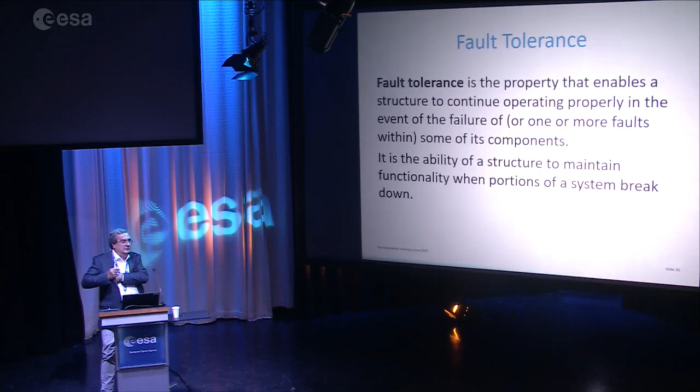Okay, can we continue?

Just to remind you, one fault tolerant is the ideal situation for everything. So everybody would like to have two reflectors, two electronic boxes, not only in the structural domain, but in any domain. But it's impractical, and of course it is not possible in most cases. But still, sometimes it is the only solution.

Okay, about the standard on fatigue and fracture control, just to mention that fracture control and fatigue is extremely important for the safety, the reliability, for manned and unmanned applications. This is what we call the structural integrity, is guaranteed with that.

Now let me tell you the difference between fatigue and fracture. If I do a test where I subject a structure to a cycling set of stresses, I can have the structure, for example, lasting a few million cycles, 2 million, 3 million cycles. This is what we call the fatigue limit. Of course, if I increase the stress, the number of cycles will decrease.

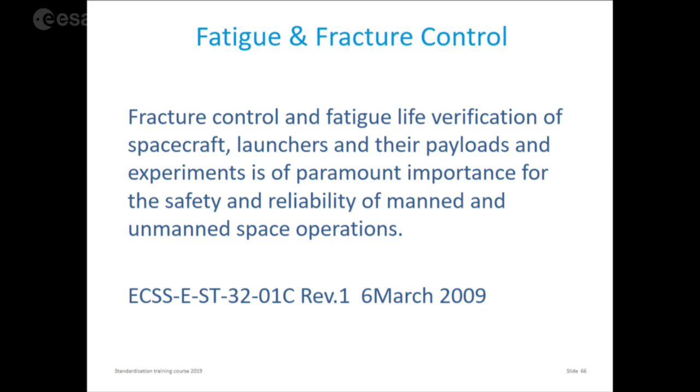the loading of a structure is not like that of an aircraft, where you have many lift-offs and landings, and a lot of loading applied during many cycles. In a spacecraft, the loading has fewer cycles.

I don't think that, depending on the frequency of a particular element, you can talk about more than 50 to 100,000 cycles with significance for this breakage.

Of course, you also have the thermoelastic effect during the whole life of the spacecraft, but this is normally not imposing a huge stress level. It's more related, as I mentioned before, to alignment capabilities, etc.

So why do we do that then? Because if you have a problem with an aircraft, for example, or with a car, you can solve the problem on ground. When we launch our spacecraft, unless it is a manned space flight, and also costs a lot of money, for an unmanned spacecraft you cannot repair anything. That's why for critical elements we apply this damage tolerance approach.

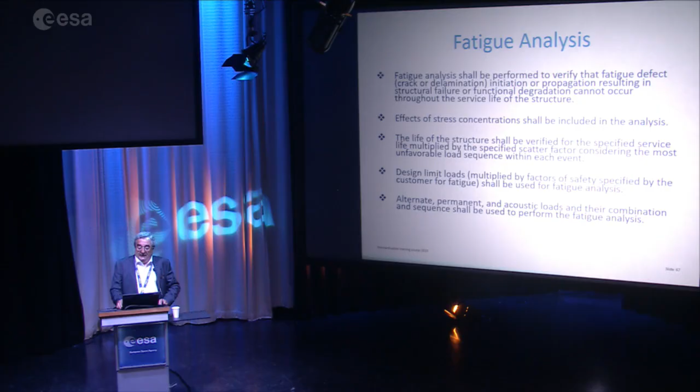This chart talks about how it is implemented, the fatigue analysis as part of the fracture control.

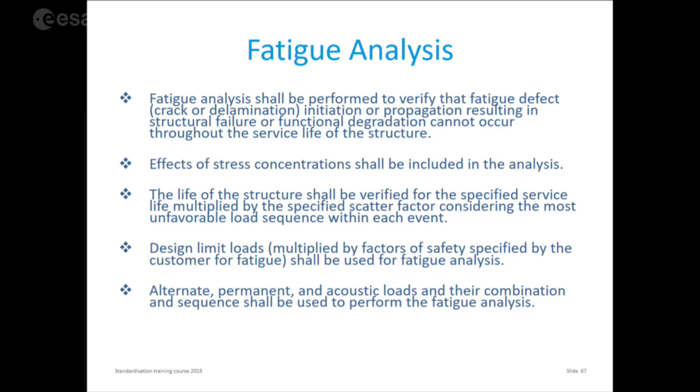And I say sometimes we do fatigue analysis, sometimes we do crack growth analysis, depending on the criticality of the element.

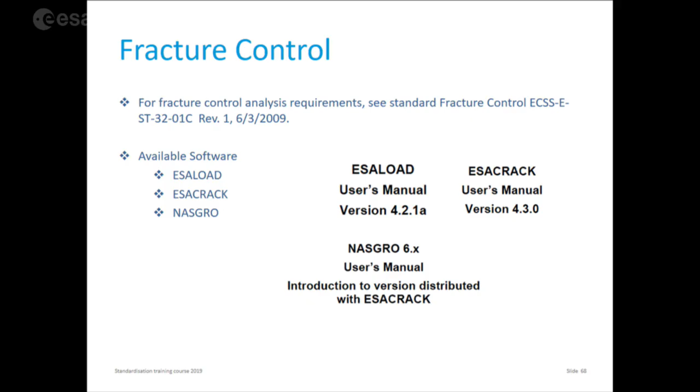And this is the software that is available. It's a software provided by ESA to all companies working in space. The ESA Load and the NASGRO are two modules: ESA Load implements the load, calculating the load spectrum depending on the number of load events and the frequency of the payload. NASGRO is a module developed by NASA, calculating the increase of the crack up to critical location, and all this is implemented in ESA Crack. Okay, just for you to know this is available, and the industry also has access to this, only for space applications.

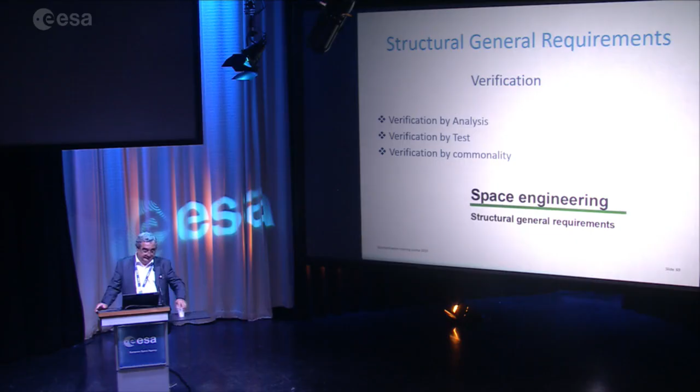Let's go now to the big part of the development of the spacecraft called verification. We have three types of verifications: by analysis, by test, and by commonality.

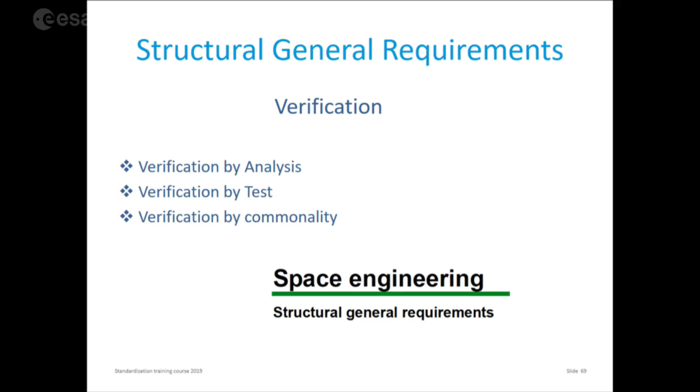The first thing we have to distinguish is the model philosophy that I mentioned before. We have a prototype approach where I have a qualification model which is tested at higher levels than the flight levels, and then the flight model is tested to the acceptance levels, which are the flight levels.

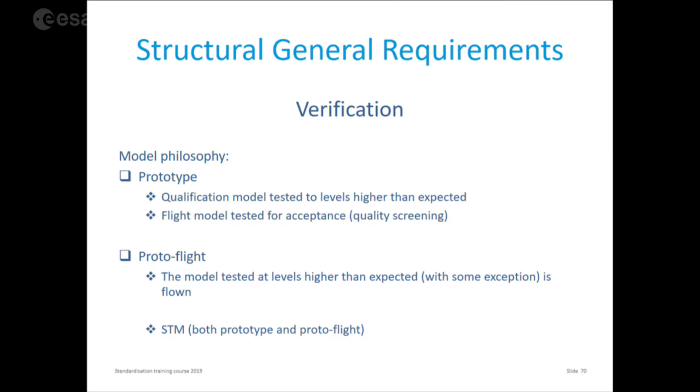I have the proto-flight approach where my model is tested to the high levels, with some exceptions, and two durations which are acceptance. But the proto-flight levels are the same as the qualification levels.

And then I have something called STM, Structure Thermal Model, which is applicable to both prototype and proto-flight. I'm telling you that when I started to work in this agency, the prototype approach was the typical one, including an STM. So we have STM, qual model, flight model.

With the passing of years, we had only the proto-flight, in most cases, with an STM. Today we have proto-flight without STM because of cost reductions, and because there is also a lot of experience, I have to say, which is logical. Sometimes when there is a new development, I think we should never renounce having an STM. This is my personal opinion, at least for the structural aspects. But I have to tell you that today there are developments where we have only proto-flight, we don't even have STM.

Another important point to prepare the verification is to have verifiable low-level requirements which are flowed down from high-level requirements. So one of the most important tasks in spacecraft development is, as I mentioned, the verification. The verification is done, as I showed you in this chart with the V, at different levels. If the requirements are verified at all levels, it's because they have been properly flowed down by the prime. So the job of a prime, which is very important, is twofold: to identify all the system level requirements, and also to be able to flow down those system level requirements into proper requirements of subsystem and unit.

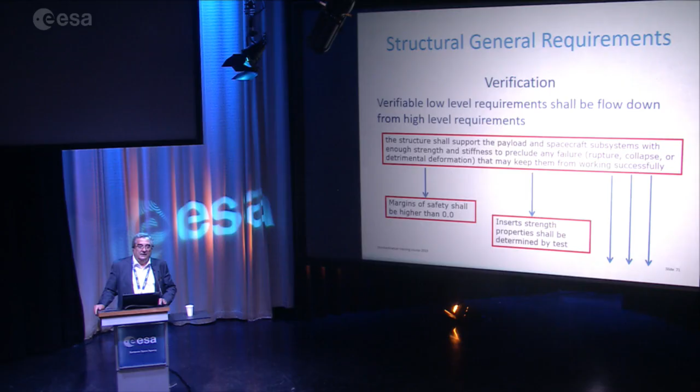Let's go to the one on the right. Today it's very common to have carbon fiber aluminum sandwiches, carbon fiber facings, aluminum honeycomb sandwiches, with a lot of inserts which are potted. Maybe you can have hundreds of those inserts. The requirement calls for the verification of the strength of all those flight inserts. I'm talking about flight hardware, 100%.

This is something that is not done in all developments. Sometimes 100% is verified, sometimes because there is a lot of experience, a lot of values of strength of the insert vis-a-vis the manufacturing process, which is very well known, there are only a few of them which are tested. So this is a typical example. The cost of the structure will be different if I have to proof test 100 inserts than if I have to proof test 500 or 50. So this is a good example of how important it is to flow down the requirements properly, because this affects the whole development and the verification.

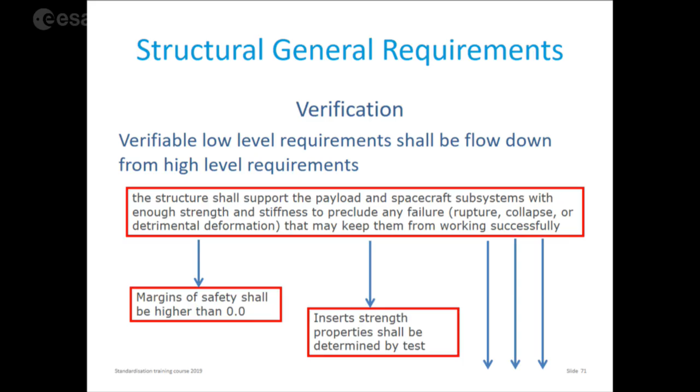It's not the same spacecraft that goes like Rosetta, very far away from the sun, as another one like Solar Orbiter that is very close to the sun. You have different configurations. You need a thermal shield for the second one, you need big solar panels for Rosetta, etc. There are differences.

And in this configuration, you have to consider, as I was saying, these functional requirements for all the subsystems. Then you have a preliminary spacecraft design, and for this you use the launch loads from the user manual of the launcher, and of course you implement your natural frequency constraints. You do a structural analysis developing a finite element model, which consists of a dynamic analysis, a stress analysis, and you also do a thermoelastic analysis, for which you have to do a thermal analysis first.

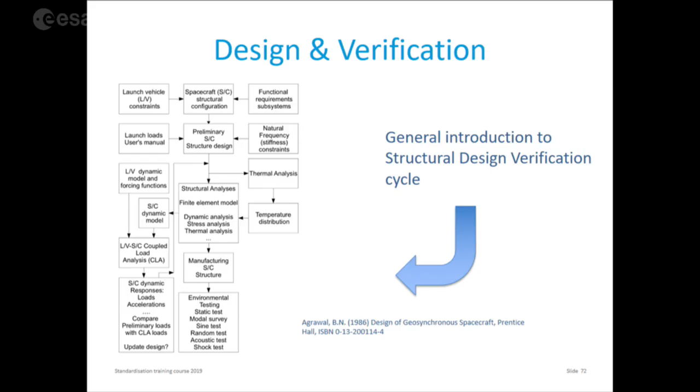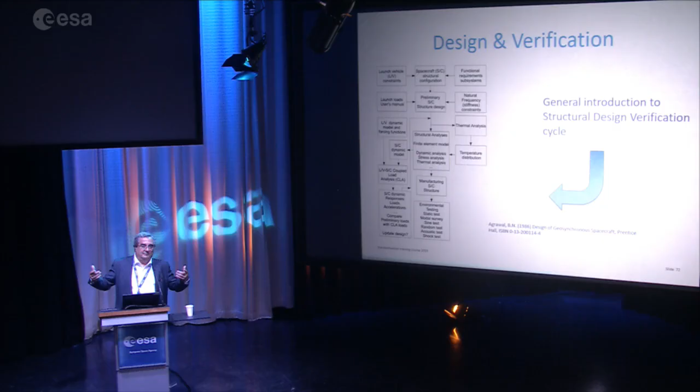So we have an idea of whether the acoustic pressure will be okay for all the elements which are critical to acoustic pressure, and we also have an idea of what the random levels will be in the different small units that we have in our spacecraft. And this is later confirmed by the final acoustic test.

So the design and verification process is more and more these days supported by more sophisticated analytical means, which are not eliminating testing at all, because I don't think that will happen, but will help in having a much easier and smoother verification. Together with the fact that for the sine test, I also believe that in the next years we will have verification done with direct transients at the interface of the spacecraft, rather than by the sine sweep, which is quite conservative. But this is still to come, both things.

This is an example of mechanical testing on ground. This is the static test to check the structure of the Sentinel-3. What you have on the left is the primary structure, and this was tested with the device you have on the right, including test jigs and actuators.

This was just to prove that we could test that the structure had the capability to withstand all the loads, and this is done at the early stage, as soon as we have an STM of the spacecraft. Of course, when I don't have an STM, I cannot do the test, obviously, and I take more risk.

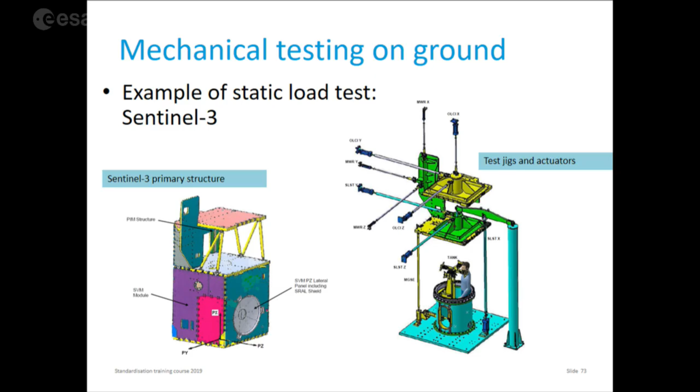I can also take my structure and put it in a shaker, and instead of sweeping from 5 to 120 Hertz, I can take it at 10 Hertz and do a test at a fixed frequency. Of course, I ramp up first, then stay a number of cycles at 5Gs, for example, then go down. This is a way to implement 5Gs in a quasi-static way in my structure. I do not like this test because it's quite damaging. I think static testing is better, and this is not done very often.

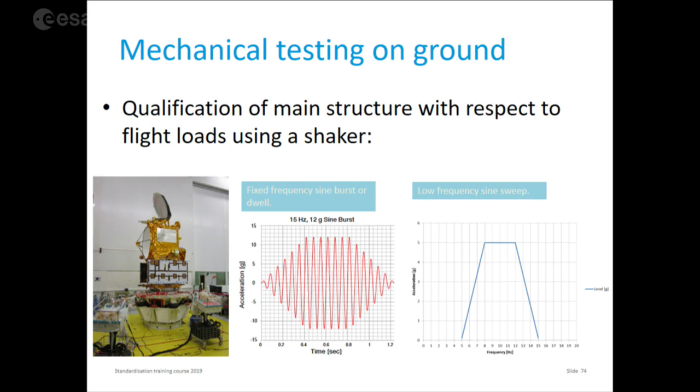A similar version of this setup, where we don't have to change anything, is a typical sine sweep from 5 to 100, 120 Hertz. This test, which is the sine burst or sine dwell I mentioned at a given frequency - in this case 15 Hertz - was done to qualify the structure, also with the STM.

Another test that is part of the verification is the acoustic noise test. This is the Rosetta spacecraft in the large acoustic facility of ESTEC.

Here, what is important is that I have a sound field that is uniform, implemented similar to the spectra coming from the launcher. The chamber has to be large enough because we have a volume effect. I cannot put in an acoustic chamber a spacecraft that is taking 90% of the volume, because then I would not be able to control the sound input.

The walls are very thick, but they also have to be smooth to allow high reverberation, which is the effect that will allow me to have specific sound pressure levels with a given spectrum, so many decibels. Typical decibels are 130, 140 for a qualification test - more than that at mid-frequencies, in the order of 300 until 2000 Hertz or even less, and then going down afterwards.

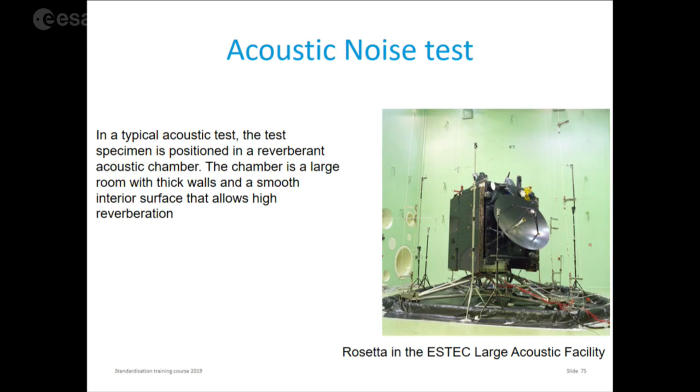It's also important to see that when I have a spacecraft in the acoustic chamber, I should try to have it not parallel to the walls, because of this effect - you see that Rosetta is a bit rotated.

In the last years, there is another acoustic test method being developed that is called the direct field acoustic noise test. This is basically to surround my spacecraft by a number of loudspeakers and a control system. I need a controller. At this moment, there are a number of spacecraft which are verified with this method.

For example, some of Galileo's spacecraft were verified by this method. There are a lot of American spacecraft which are verified with this method. Now we are working at ESA setting up guidelines to compare this with the other method, to make sure we can use both methods at the choice of the prime, and that both are going in the same direction to qualify your structure acoustically.

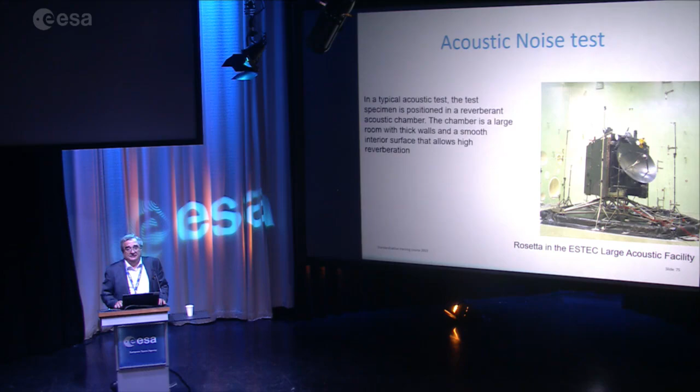With this one, you have a dedicated facility where you put your spacecraft. Due to the shape and volume of the facility, the different holes you can see there, and the smoothness and thickness of the walls, you are able to provide a reverberant noise field. This gives you control, so you have the given energy at each frequency.

In this other one, you can be anywhere - you can be in the living room of your house. Of course, I don't recommend your house. You surround the spacecraft with a number of loudspeakers, and then you need a controller.

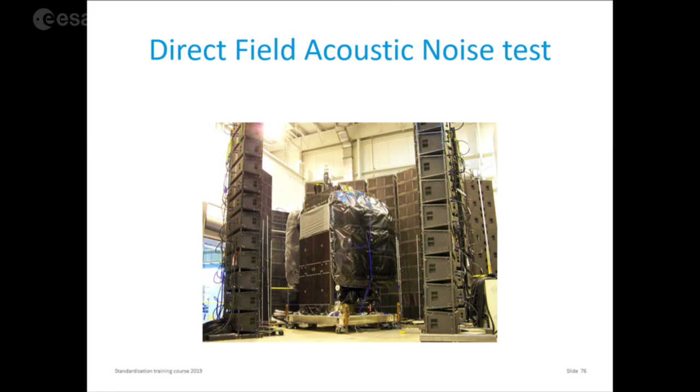There are companies developing controllers which control the energy in each loudspeaker, and in the end it is a sound level that is called direct field acoustic testing, but it should be providing the same - and this is the difficult thing we are evaluating - the same energy at each frequency band.

The advantage of the second one, it depends - the bottle is always half empty, half full. With this method, you can put your loudspeakers in a truck and go test anywhere. With the other one, you need to have the facility. Yes, but once you have the facility, well, you don't need this other thing. So it depends whether the facility goes to where the spacecraft is, in which case I do direct field acoustic, or the spacecraft goes to the facility, and I do a typical reverberant acoustic test. The important thing is that both are possible, and both achieve the final goal, which is to qualify.

One thing I have not mentioned - sorry if I forgot - is that the most important objective of a test is to provide the correct input. So if I do a sine test and have to test my spacecraft to 1G up to 40 Hertz, and then go to 5Gs later on, I should be able to control the shaker to provide this input. If I provide more, I can break it. If I provide less, I will underqualify my spacecraft. In acoustic testing, it's the same thing.

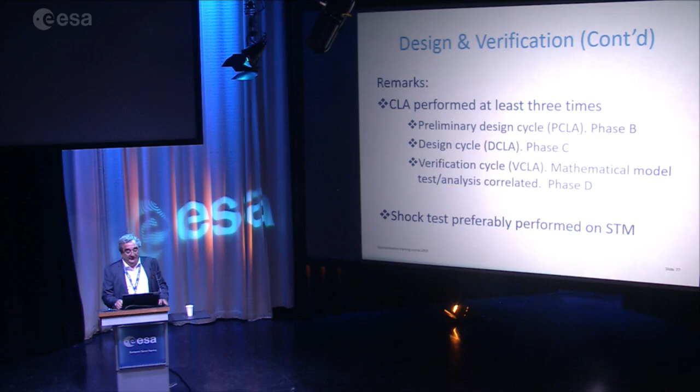Then I think I already mentioned these two things. We should do the CLAs at least 3 times, hopefully in the future even more. And the shock test should only be performed on the STM to identify this - this is also part of the verification, of course, on the STM to verify the transfer functions and to do as few shock tests as possible on the flight units.

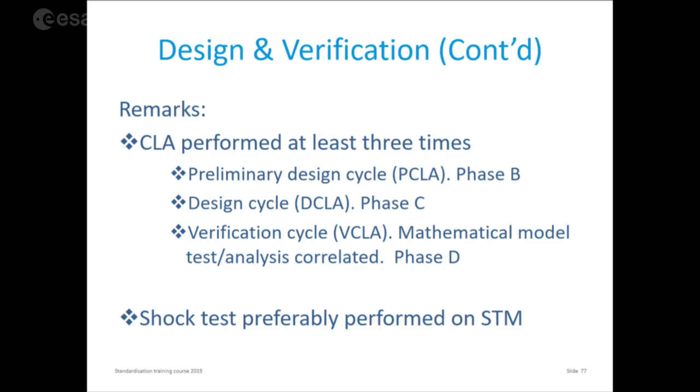Okay, what is the final verification? The final verification - everybody knows what a VCD is, no? A verification control document is when you are already in full compliance with all the requirements. If I have requirements, I verify by analysis, I have the stress report, the analysis report. If I have requirements verified by test, I have the test report, and everything is okay.

Also, before that, normally there is something called the VCD - that's the final one - but you also have the verification control procedure, where you check what you have to do. You check whether the verification of your requirements is appropriate. So sometimes you do a verification by analysis that is not enough, and this you have to know beforehand.

For example, I have thrusters in my spacecraft. I may have thrusters for attitude and orbit control. I want to have these thrusters tested at unit level. Some companies say, no, I have a model of my thruster, I don't do any test, I do just an analysis. This is a typical discussion example. Then, before I enter into the full verification, I need to have this clarified. Because if I go to my verification, I request a test on the thrusters at thruster level, and they have not performed it, then we have a hole and a big issue.

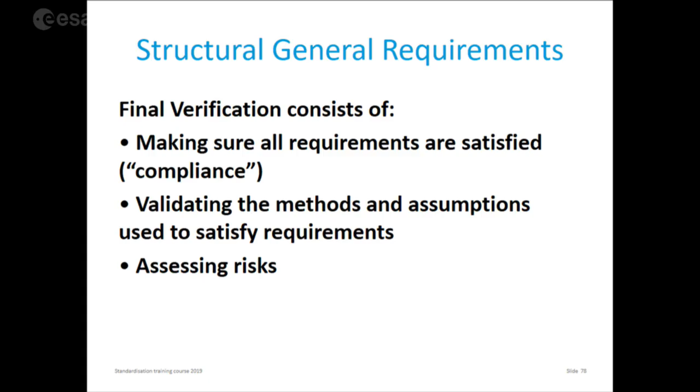The typical criteria for assessing the verification of loads is that the margin of safety must be greater than or equal to 0. All the structures must be qualified by static or sinusoidal testing, and also by acoustic or random testing.

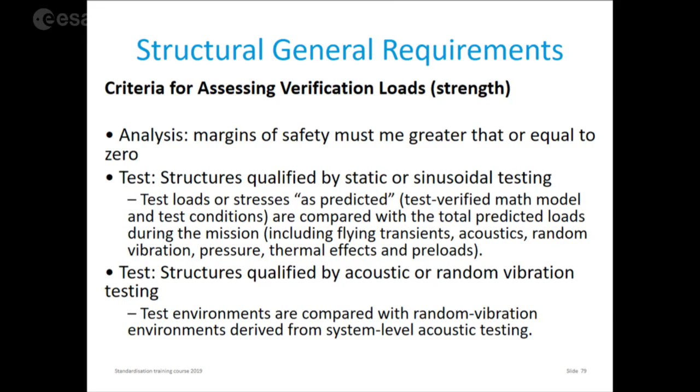So I think what is written here is obvious. You also know what the margin of safety is.

The formula there is the big formula everybody uses. So in the upper part, I have the design allowables - loads, stresses, whatever. In the lower part, I have my design limit load that I apply with the factor of safety, and then I divide the values and subtract 1. If the margin is positive, it means that my design allowable is higher than the limit load times the factor of safety.

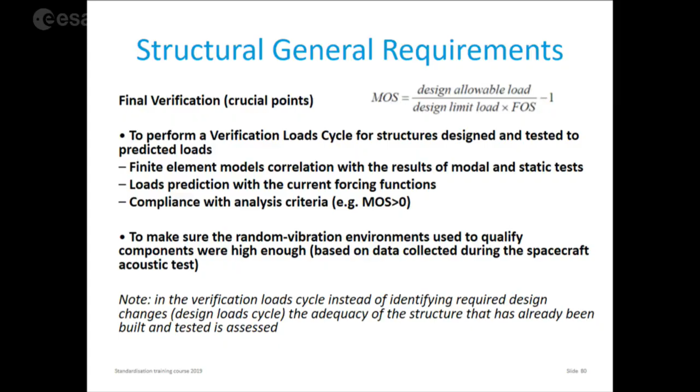Then I also have to do the verification load cycle. And I have the coupled analysis or the acoustic analysis, etc., plus the test. And then I have to have the models correlated and the loads prediction. And then I have to have margins of safety which are positive.

So basically, when I do, for example, the verification, let's start with the acoustic loading. When I do my acoustic test, I check that all the random levels, which I have in all the internal parts of the structure, are spectra which are lower than the ones the elements are being qualified to. If I have the pressure loads on elements which are sensitive to the acoustic pressure, I also have verified that the structure, whatever reflector, sun shield, solar panel, has undertaken these loads by test, or because they have already been done many times, we already know that they will take it.

If I do a coupled analysis, I verify that the loads coming from my final coupled analysis with the model validated, etc., are below the ones I've used for the design, and that's enough, because my design already has margins of safety which are positive. So this is basically the way it is done.

Now, main inconsistencies of the load verification process. I mentioned a number of times in this presentation, in this course, that the sine test is an artificial one. We have uniaxial vibration and shock test facilities. Well, the dynamic environment for the spacecraft are typically multi-axis. We have 6 degrees of freedom system inputs. For the shock, we don't have a solution yet.

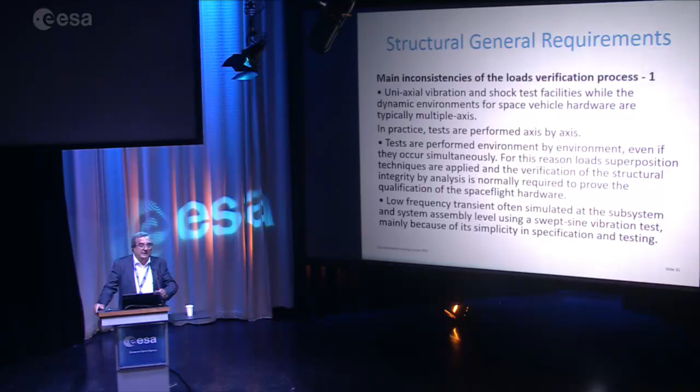If a structure is, for example, sensitive to a particular load cycle where temperature is important and plays an important role... I tell you, in some flights of Vega, for example, we have high temperatures, 120, 150 degrees in certain flight events, because there is a lot of sun, and at the same time, we still have the thrust of one of the stages. Then you have to do your thermal test, you do your coupled analysis, and then you combine and see that when you combine the mechanical loads with the thermal load, the margin is still positive. This can happen.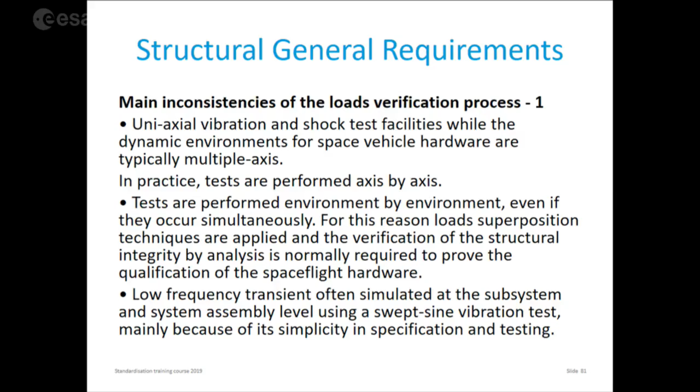And then the last point is the one I already mentioned. Low frequency transient is often simulated at the subsystem and system assembly level using a swept sine vibration test. I mentioned many times, mainly because of its simplicity in specification and testing, but it's conservative.

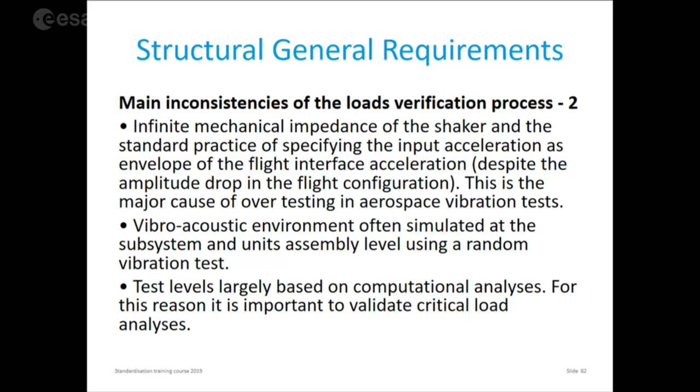Another point that I also mentioned is that we have an infinite mechanical impedance on the shaker. I told you that we have an infinitely rigid interface. When I put my spacecraft in the launcher, it's not so rigid, it's soft. And then this may lead to over-testing. That's why we have to be very careful with the notching.

Vibroacoustic environment, this is another inconsistency, often simulated at the subsystem and units assembly level using a random vibration test. This is what I explained before, and this is now less and less a problem, because I can do an analysis at the very beginning, an acoustic analysis, and I can adjust the random levels. And this is later on proved by the acoustic test at the very end in the verification.

But I will not use, like we were using before, random level spectra that were very conservative, coming on the envelope of the envelope of the envelope of many missions. And then I don't have to over-test my electronic box to a high-level random spectrum when in the mission it's going to see a tenth of it or a fourth of it or whatever.

Test levels are largely based on computational analysis. For this reason, it is important to validate critical load analysis. This is a fact, but at the same time, we are these days not only performing the analytical verification, we are also able to simulate the test very well. So we know whether our test is going to be dangerous or not for our hardware, talking mainly about the flight hardware.

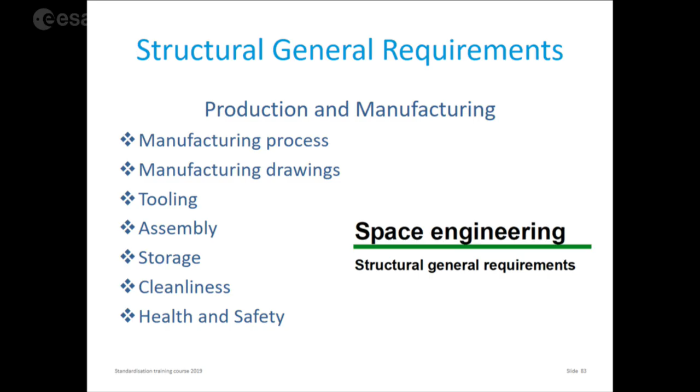Mainly the one I didn't discuss much in detail was health and safety, but I think it's obvious that you can have a lot of problems when you are integrating, manufacturing, assembling your spacecraft on ground, because there are many hazards. The typical one I mentioned before is pressurized elements, the tanks, and all the propulsion systems of your spacecraft. They are hazardous. You also have hazardous substances which may affect people on the ground.

There are even facilities I've seen where they use a lot of overwrap pressure vessels. It's a pressure vessel made of carbon fiber with a liner inside, either titanium or aluminum. The property of these vessels is that they have very high pressure, 200 bars, and when they fail, they explode. I've seen cases where they do explosion analysis. When you have the production facility of the spacecraft, there is maybe a perimeter of 20 meters where only the people dealing with this are allowed to enter, because this minimizes the risk for all the other people in the integration facility.

So nobody can enter there when there is pressure built up in the pressure vessel. This is an example of requirements. You can put that requirement in your general system requirements, or if you are the prime, you can put that requirement to your subsystems and make sure that this will never happen, that nobody except the one or two persons working on this pressurized element will be working close to it.

In service, you have ground inspections, in-orbit inspections, evaluation of damages, maintenance, and repair. Maybe repair is something I have not discussed, but there are a lot of repairs which are done, mainly in composites. It's very typical to have failures in composite because things drop. You don't believe it, but it happens. And then you have to put doublers on your sandwich because you have damaged the spacecraft structure.

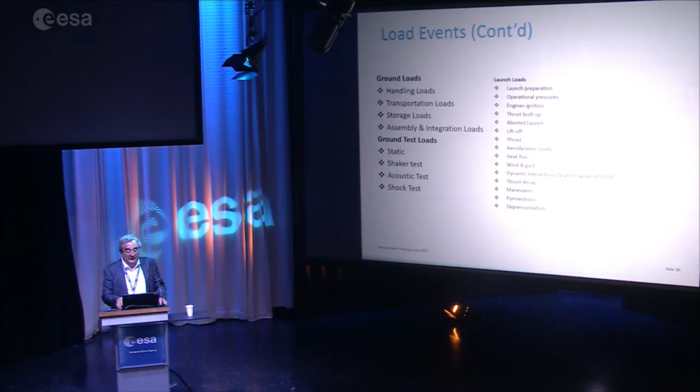Now, going into the back charts, I want to mainly avoid repeating what I already said. I prefer to go through specific pictures. You have all this information, you will get the presentation.

This is the typical Vega launch. You have the P80, which is the first solid booster.

Once this one is released, we have the second booster, the Z23, for which the load case we consider in a coupled analysis is the ignition, and then pressure oscillations. And then we are left with the last one, the Zefiro 9, for which we only consider ignition.

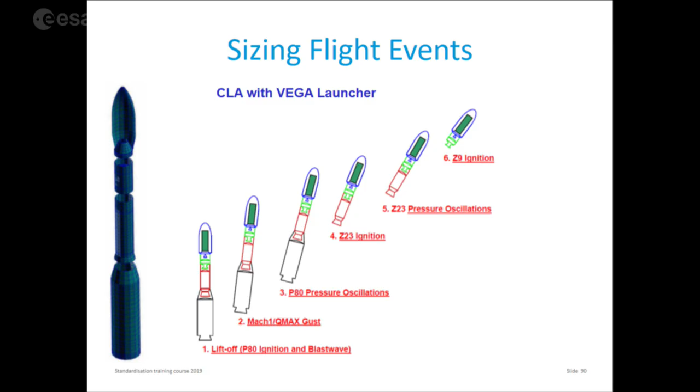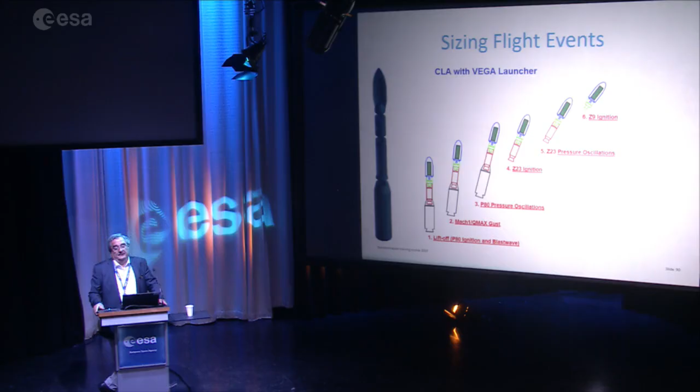After these three solid boosters, you have the AVUM, that is liquid driven. It's not solid, and it's the one used to locate the spacecraft in a particular configuration or attitude, and also to bring the upper stage down into the sea for demise.

Okay, these are things we have already gone through in Ariane 5. The dynamic coupling I already mentioned.

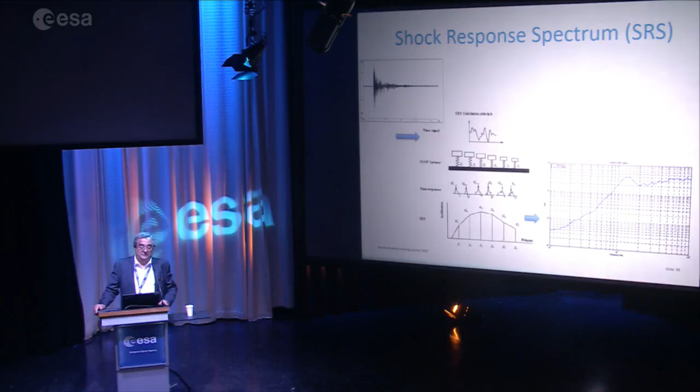Let me go to this, which is how we perform what I explained before about the shock response spectrum. On the left you have the time domain shock. This time domain transient has a lot of frequency content. Then I have my set of 1 degree of freedom systems, where I'm changing the stiffness and the mass. I'm sweeping the frequency, and calculating for each one the response to the transient. Then I get the curve on the right, that is the shock response spectrum.

One thing I didn't mention before, but it's obvious, is that when I do the SRS, I lose the phase information, for sure. But this is the way it works, because doing the verification by analysis is very time consuming in the time domain, and sometimes it's not possible.

We have limitations with the step. When you do an integration of this transient in the time domain, you have limitations with the step you can use. And if the model is too big, it's better to do this, it's more practical. That's why the SRS is implemented.

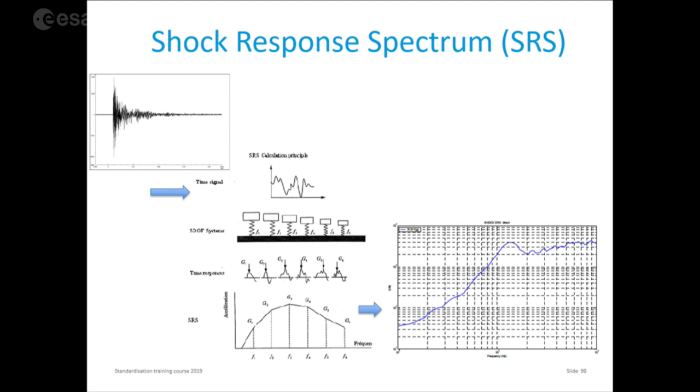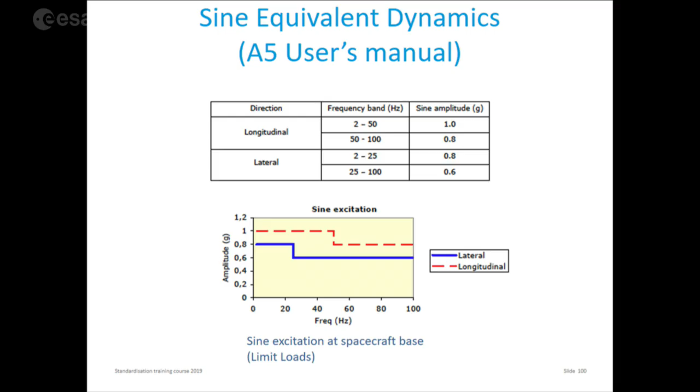So these are very, very extreme conditions, because the launcher, of course, wants to be conservative. And these are the levels of the sine excitation at the spacecraft base. You can go 0.8 and then 0.6. In practice, we put less, for the reason I told you, because I have already made a design with less coupling, and then I have less loads, and then I can have a much lower sine test. Okay, but just to give you an example.

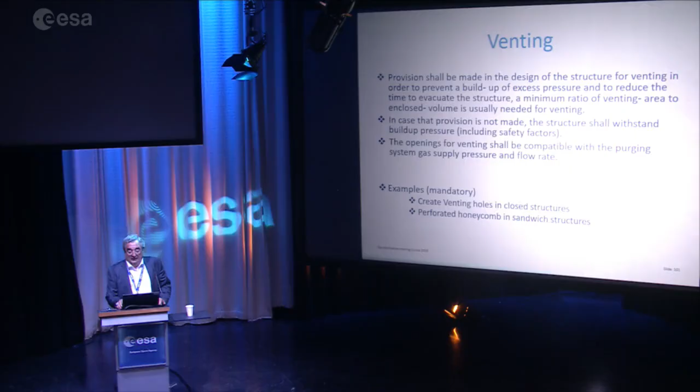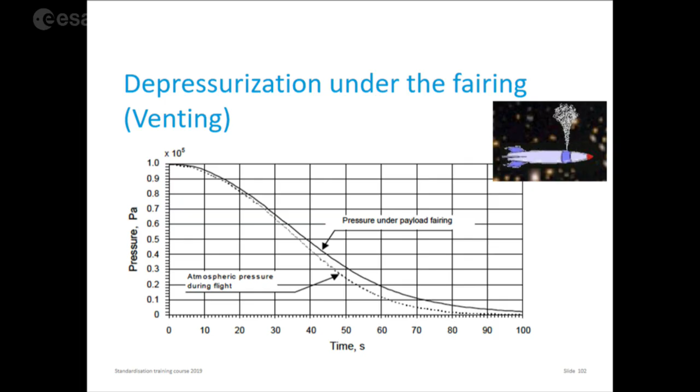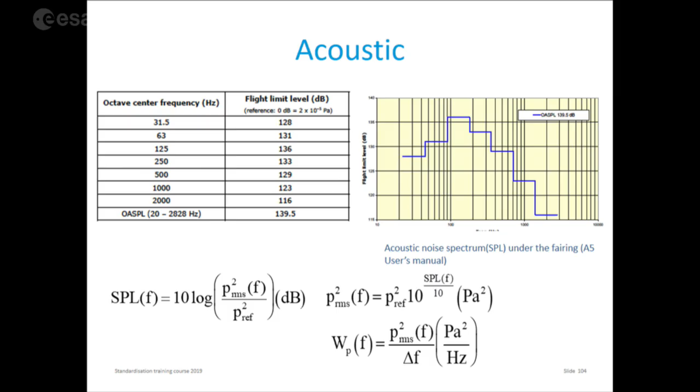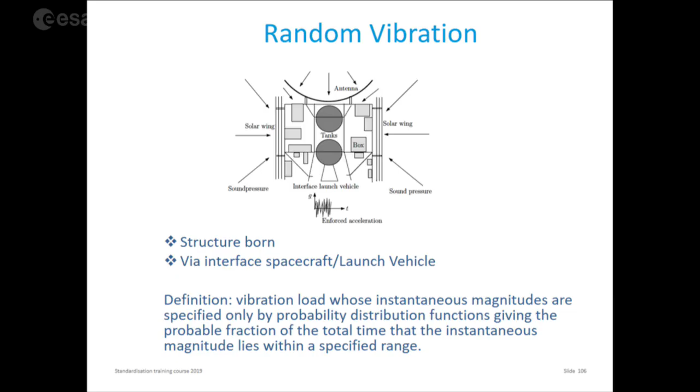Okay, then this is the typical box for random vibration. We already have a similar thing where I explained to you all the environment. Let me go, because I want to show you.

I didn't say much about microvibration, but this is an important thing. Microvibration is also a driving requirement in 2 directions: you have the emissivity and you have the susceptibility. So if I have a spacecraft and I have a very delicate instrument, then the emissions of the disturbers, which could be the reaction wheels or the cryocoolers or any other thing, are very important because they are transmitted through the structure up to my equipment, and then my instrument can not work properly. So this is one case.

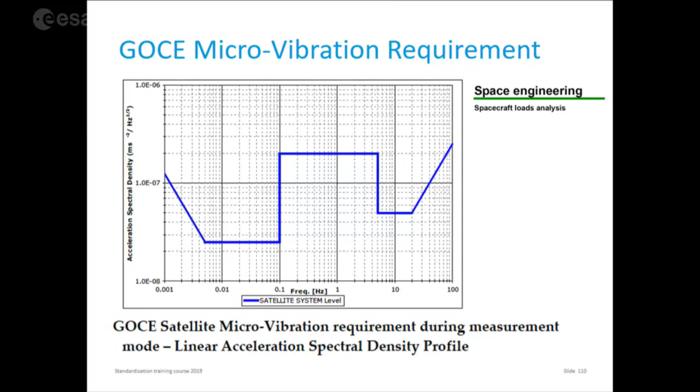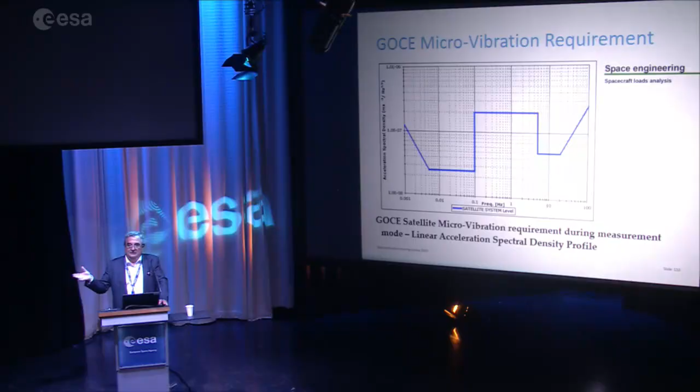The other case is that I have two instruments, and one of the instruments has a disturbing rotating part, for example. It's not working well if it gets a lot of noise from the other instrument and from other disturbers. So what I try to say is that microvibration is an effect that you have to consider in both directions.

It's quite demanding. These days we do a lot of analysis and characterization, and this microvibration happens in a very wide frequency band. We can be at low frequencies, 5 Hertz, and go up to 200-300 Hertz.

The final test is done by hanging the spacecraft, switching it on and measuring on ground. Of course this is validated with a model where you remove the gravity effect later on. All these kinds of things are done, but there is a lot of characterization and verification performed on microvibrations. It's an important topic because at the end of the day, it's part of the functioning of the spacecraft.

A few words on modal survey. This is a modal survey which was done for GOCE a long time ago. Basically, on the left side you have the actual hardware. In the middle you have a finite element model of GOCE, and on the right side you have what we call the test model.

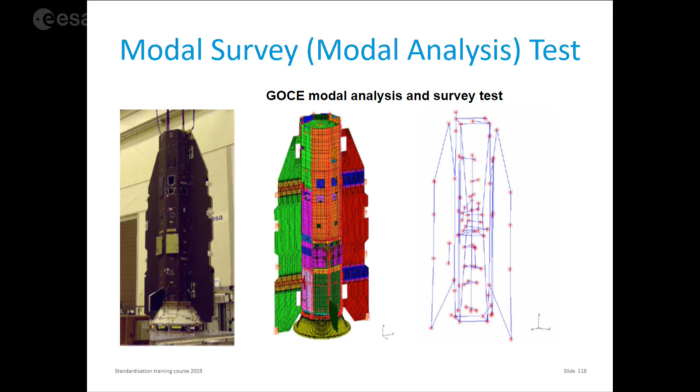In the test model, all the red points are points where you have accelerometers. You excite in different locations, recover these measurements, and with them you can extrapolate to the middle FEM. Then you adjust the FEM to the real modes measured in the test model, and you end up with an FEM that is representative of the mode shapes and frequencies of the structure.

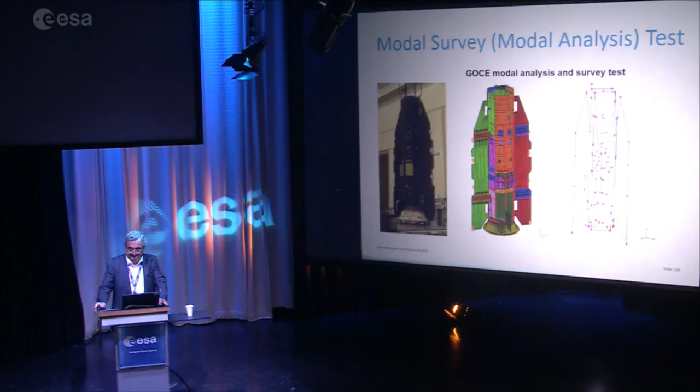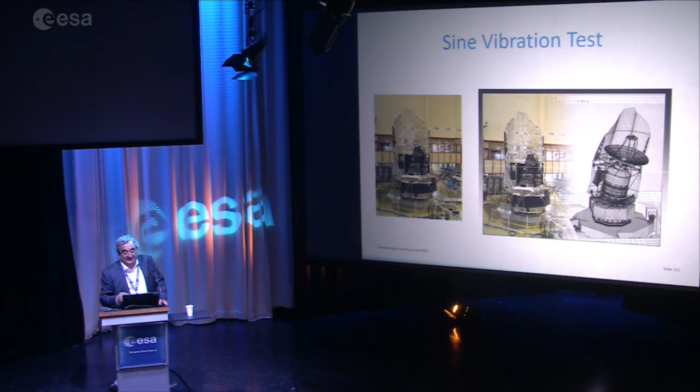This is a chart I like because on one side you have the photo of the test in the shaker, and on the other side you have the FEM of everything. This is what you need to validate your model.

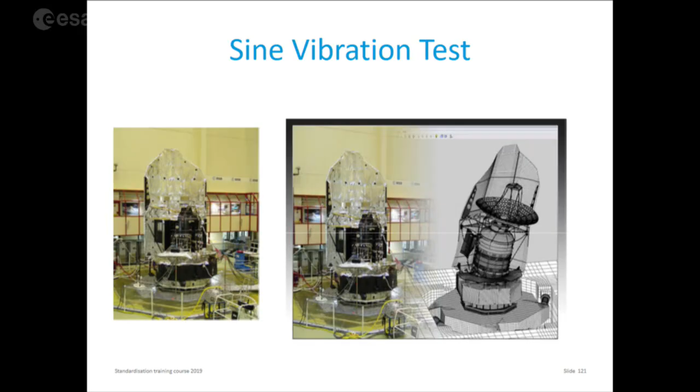The last chart I want to show you is again on the sine test. I want you to know that in the sine vibration test, we input the signal at the shaker, but we don't only have accelerometers across the whole spacecraft, we also have - and this is very important - a force measurement device at the interface.

I mentioned before that we do notching to avoid overtesting. This notching is increasingly controlled by the interface forces between the spacecraft and the shaker. This is called primary notching.

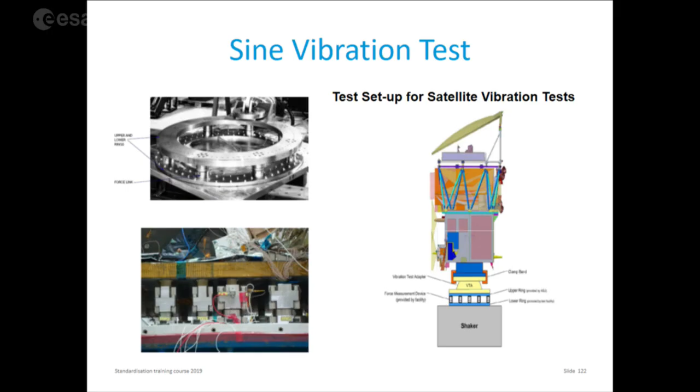There is a secondary notching based on accelerations at certain local positions of the spacecraft, where you have different payloads or reflectors or whatever, and they are based on acceleration. But the most important one is the one based on interface forces.

What we do is make sure I decrease the input - the shaker input is always in acceleration. I decrease the input, but I will never go too low when I reach the resonance of the spacecraft. I will never go below a value of acceleration at the input that gives me a force at the interface that is less than what will be seen during actual flight.

Also, for the secondary notching, I will never go to an acceleration less than the one that will be seen by this particular element of the spacecraft. With those two notchings, I can be sure that I will not under-test my payload or my spacecraft, and I will also make sure that the launch authority will approve my test.

And this is basically what I have. I think it's good that this year I had the time, because normally I had more charts - many charts - and over the years you start learning, you cut them down. I hope I gave you an insight into the whole process: design and verification, and functionality of the spacecraft structure.